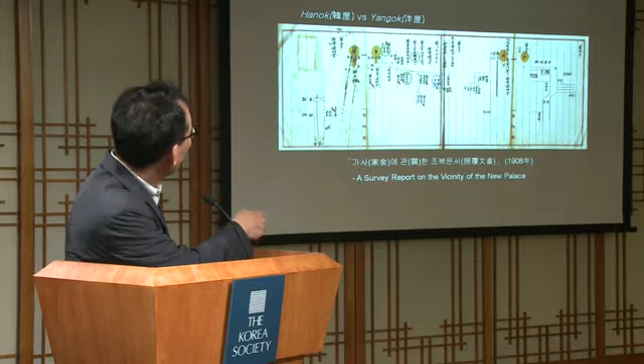이 주변에 외국인들이 많이 모여 살기 시작하는 곳이라서 그곳을 조사하라는 명령을 받고 어떤 관리가 조사를 했죠. 그래서 조사를 해서 보여주는 조사 복명서입니다. 여기서 보시면 양옥이라는 말, 그다음 한옥이라는 말이 같이 사용되고 있습니다.

The king wanted to do a survey around that area because foreigners started residing there, so he wanted to have a survey conducted.

So the report you're seeing is the survey report, and you can see there is a word Yangok, which is Western style architecture. Meaning, Hanok was coined to differentiate from the word Yangok, Western style architecture.

Therefore, when Hanok was first coined, it referred to any types of buildings which succeeded in maintaining traditional characteristics of Korean architecture, covering all traditional buildings of that era.

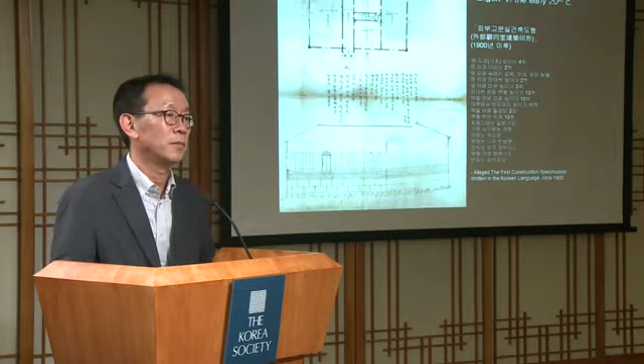And Yangok, in contrast, referred to all the new types of architecture that came in after the port was opened in Joseon.

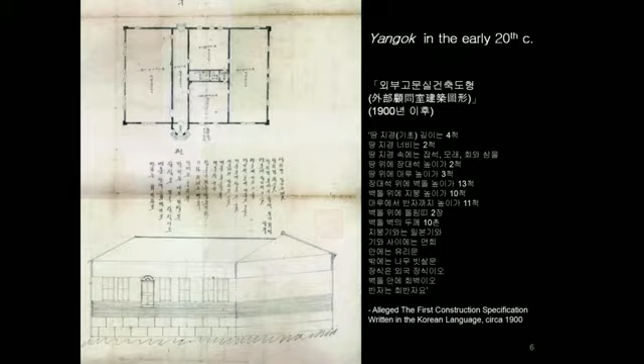Here are a few samples of what those Yangok buildings looked like at the time. This is one sample, an architectural plan showing how the Yangok, the Western style building, was built. Different from what we'd expect of Western style architecture, Yangok was simply wooden architecture built in Western styles.

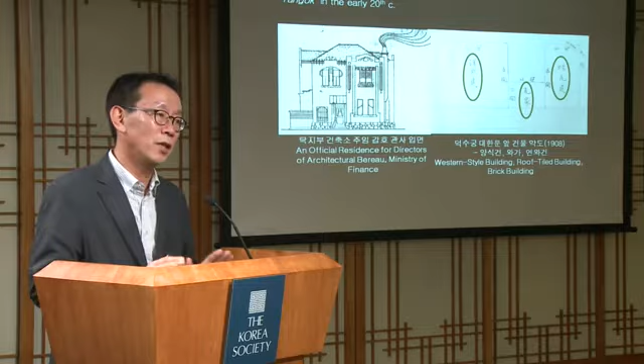Even that, passing through 1960, Hanok was no longer built even for residences. As we arrived in the 1960s, the Hanok style house wasn't built that much longer either.

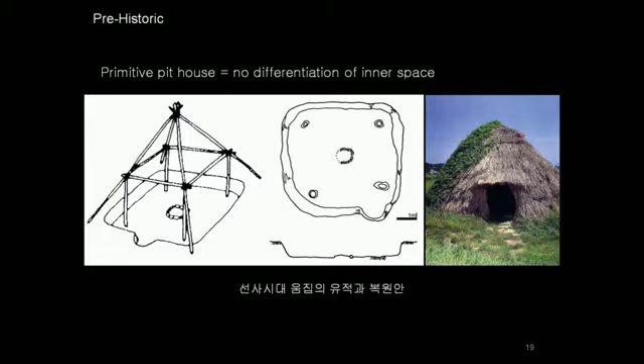This is a house in the prehistoric era. Primitive pit houses are quite universal, regardless of the place or region. Sorry, there was a misinterpretation. He said that there is no separation of the spaces in the primitive house, not fireplace. Forget about fireplace. There was only one space in the prehistoric pit house.

And as we move to the ancient times, each spatial element started being developed. For example, bueok, which can be translated as kitchen, is one of the exemplary service spaces in the housing history.

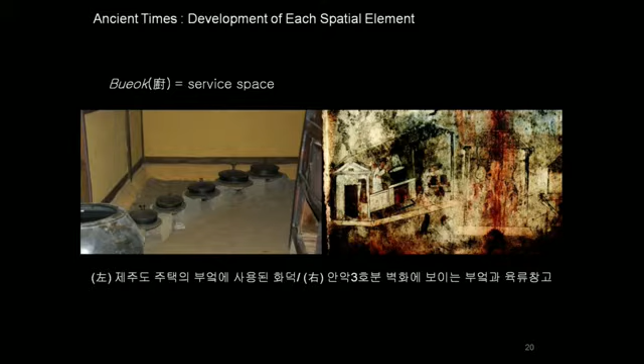You are looking at the right side, the murals from the Goguryeo dynasty, which go back to the 5th century. And in the murals, it depicts the bueok as a separate space, and also a separate building.

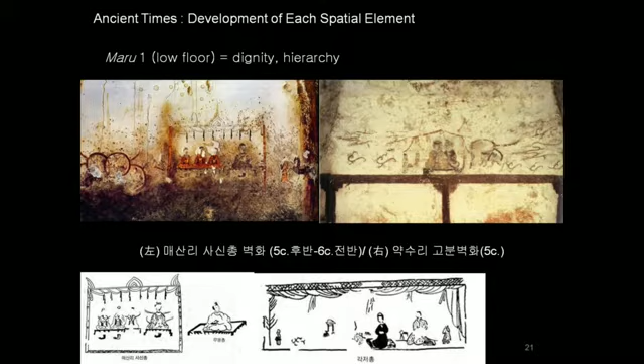There is another origin of maru. The second type of maru is the high floor.

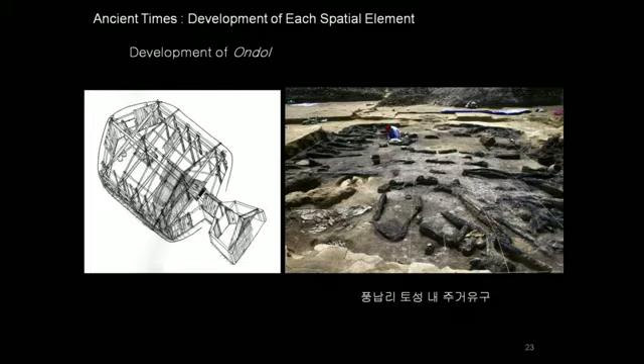So we call it partial ondol, or we also call it 쪽구들.

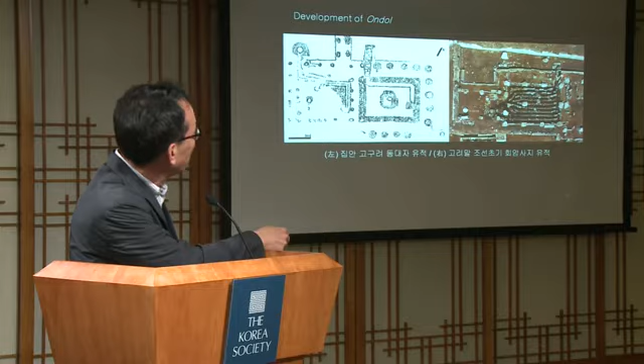The other photo is from the late Goryeo dynasty. That's the photo that shows the completed version of ondol used in Korean history. And as you see, the stove was outside of the building, but using the stove, the whole house was heated, and the heat went through the chimney out of the house.

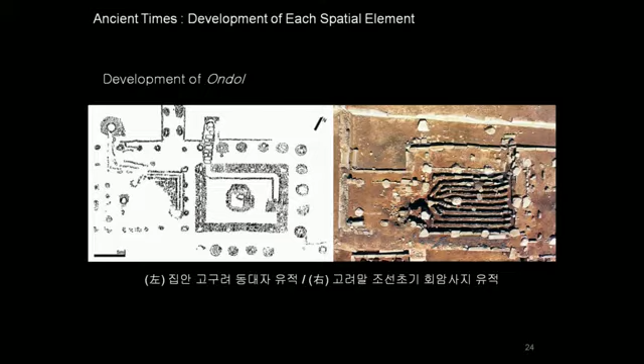It is a very unique element of Korean architecture to have the whole-floor ondol system, and it also can be seen everywhere in Korea.

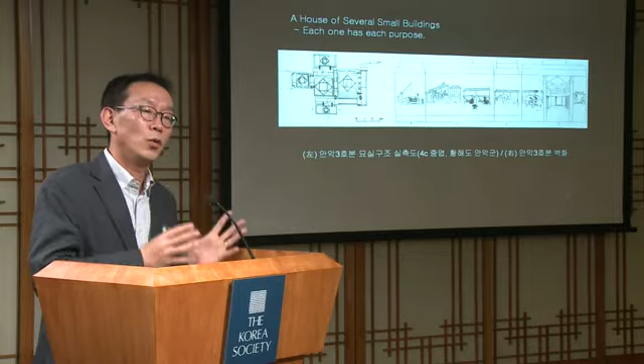In ancient houses, these different spaces were developed separately.

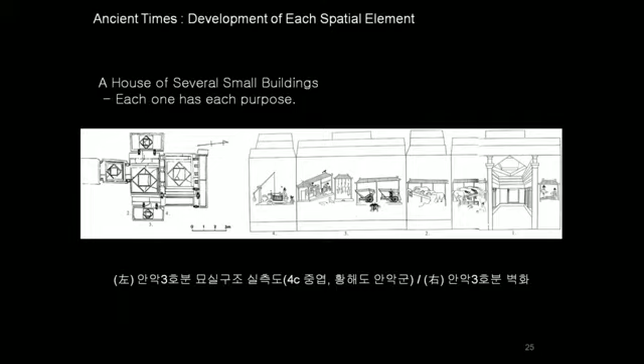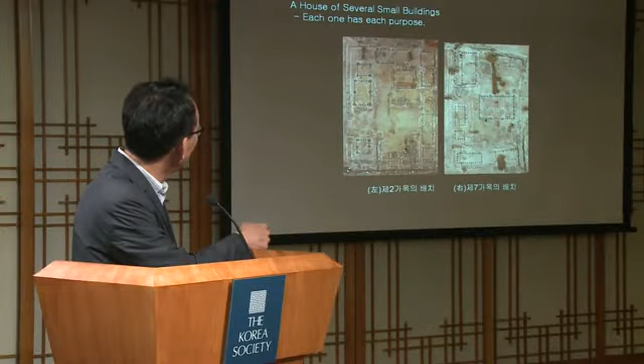As you see, one house consists of several small buildings inside. Each building doesn't exceed 3 bays. This building, for example, is two bays, one bay, even one bay. So bay is the measurement unit for a space in Korean architecture. So as you see, there's like 3 bays and 3 bays.

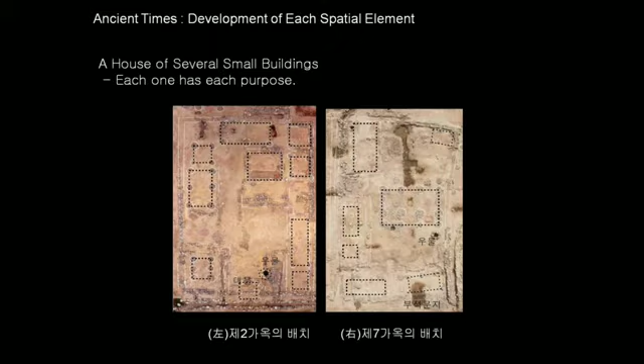Till we arrived in the medieval age, we don't really see two different spaces combined together. I mentioned there are ondol, maru, and bueok as the 3 element spaces in Korean architecture. Ondol and maru are the easiest form of combination.

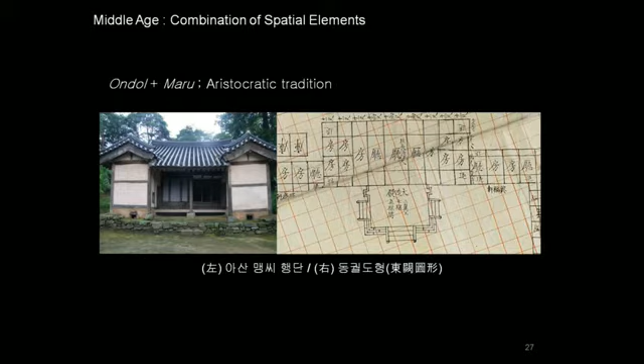The right photo is the plan figure of the East Palace during the Joseon Dynasty. So three bays in the middle are maru, and the five toward each side are ondol. I call it an approach that follows aristocratic tradition.

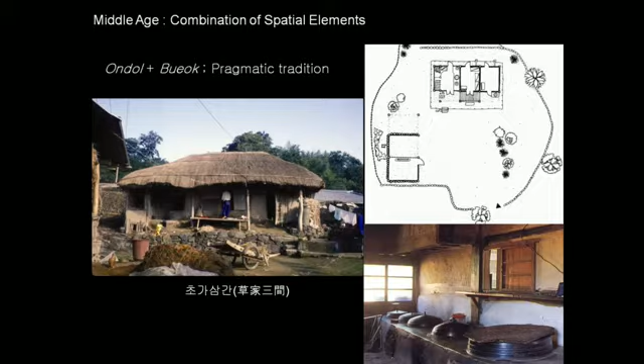Some of you still remember the old folk songs. Once you build the chogasamgan, the small cottage with 3 rooms, the first thing that you do in Korea is to invite your parents and live with them forever.

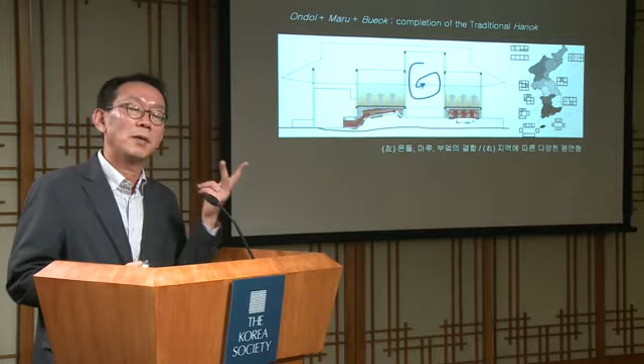The final possible combination is combining maru and bueok, but I couldn't really find the best example in history.

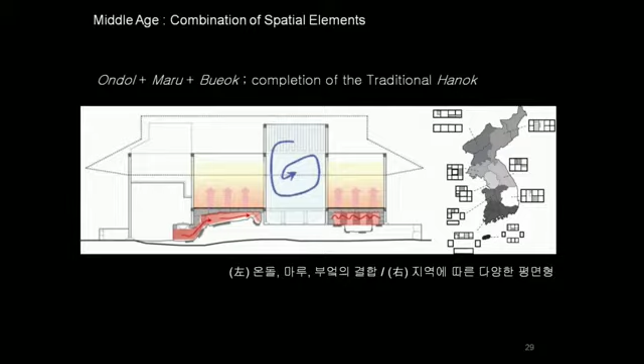I assume the completion of the 4 bays of Hanok happened in the 16th century.

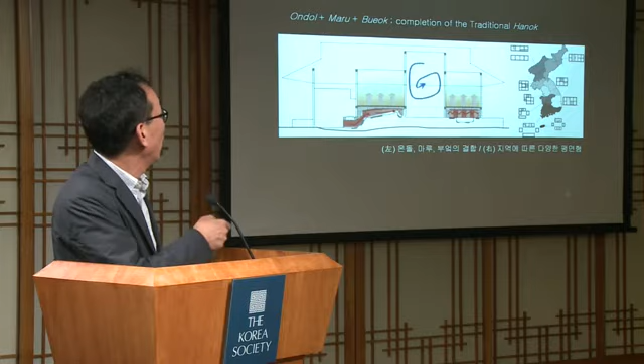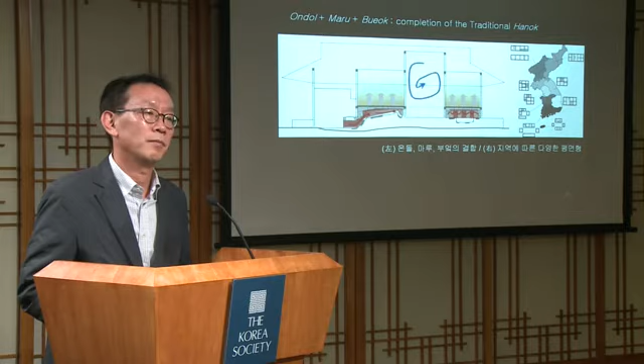So when I say there's a traditional Hanok completed, I refer to the combination of 2 ondols, maru, and bueok.

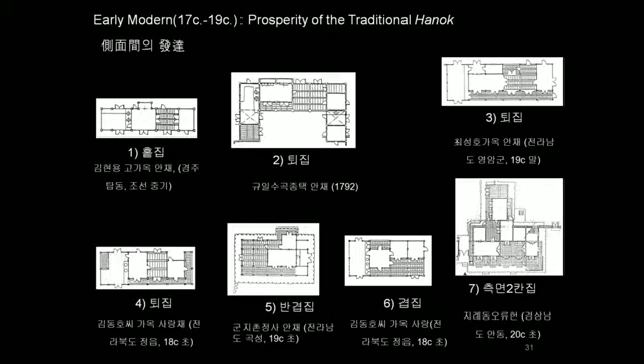So therefore, the tradition referred to when it comes to Hanok was only formulated over a very short period.

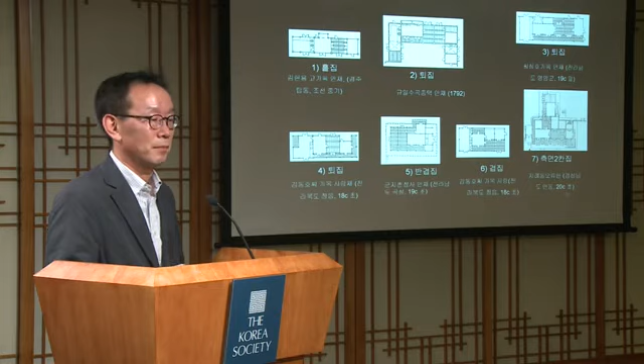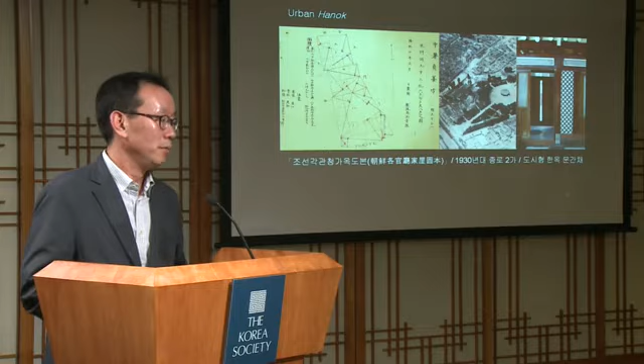As Korea met Western forces in the late 19th century, Korea got into the modern period.

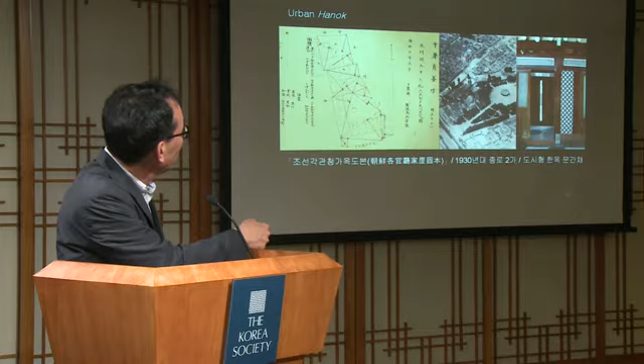The photo that you see in the middle is Seoul near Pagoda Park. As you see, the houses are highly concentrated.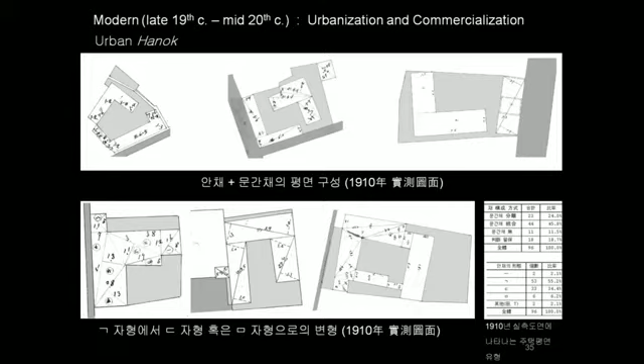The 20th century is the first era in which houses started being sold ready-made.

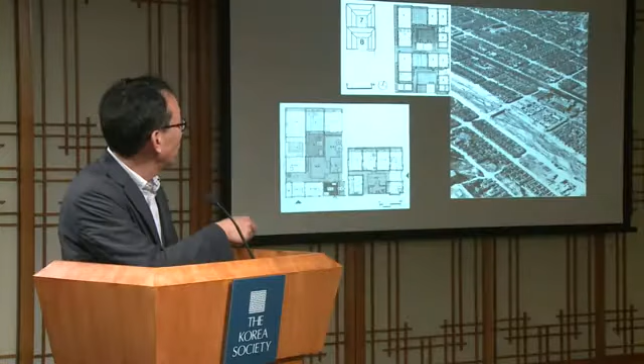And then they started building standardized formats of houses.

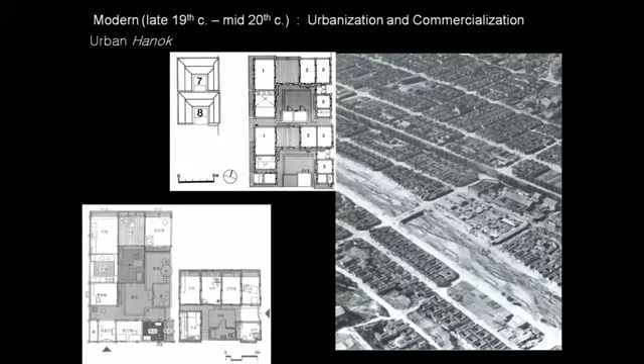Those people who used to live in Seoul back then still think Hanok was the shape of what you're seeing right now, in the standardized form.

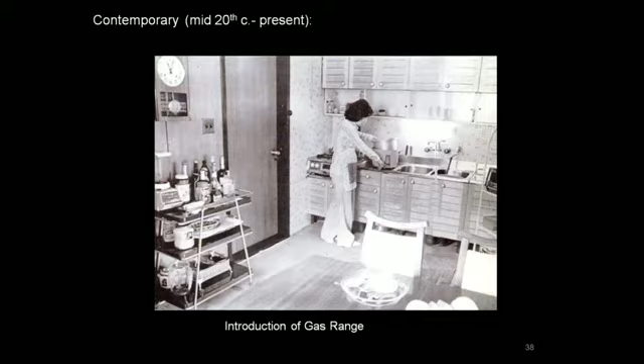1960년 정도까지 지어졌습니다. So hanok was built accommodating some Western elements till the 1960s.

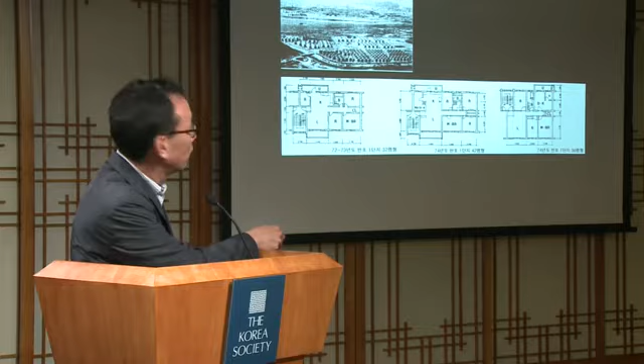So if you look at the plan figure, it quite looks like an American apartment, separating day functioning spaces and night functioning spaces. On the left side there is the kitchen, but on the right side there are 4 rooms all together.

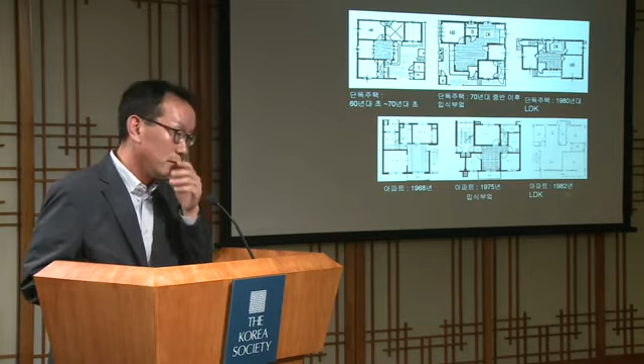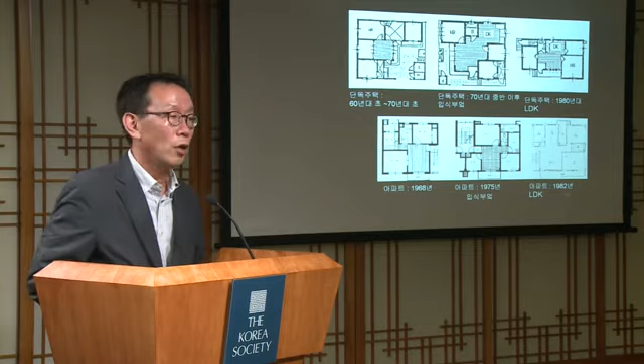This is the approach used in Korean Hanok style, with the arrangement of buok, bang, maru, bang—kitchen, ondol room, maru, ondol room. These plans also show the process of buok and maru getting consolidated together.

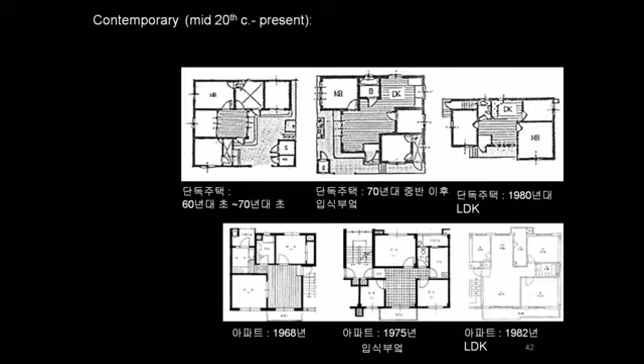The figures on the right side, the upper one is for the single house and the lower one is for the apartment. You can see that kitchen and maru get consolidated totally. But if you look at the other plans, back in 1968 and 1975, they still tried to put a separation between bueok and maru by using a curtain or sliding doors.

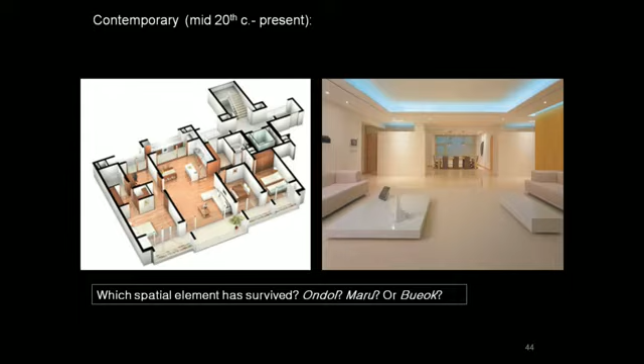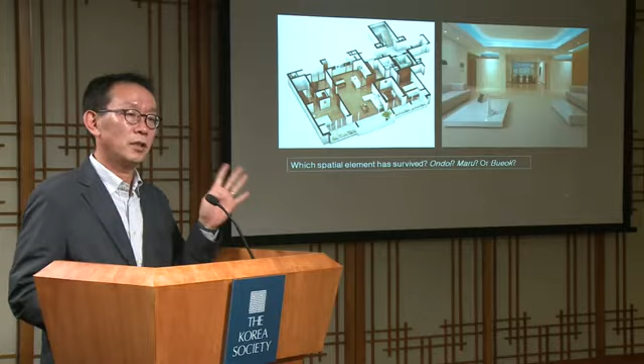So currently in Korean apartments, there are only 3 spaces without ondolmaru flooring remaining: the washer-dryer utility room and laundry room, the bathroom, and the entrance.

I think the last space to remain without ondolmaru will be the entrance area. Ultimately, the driving force behind all these changes in Korean housing architecture is the fact that Korean people take off their shoes and live indoors barefoot.